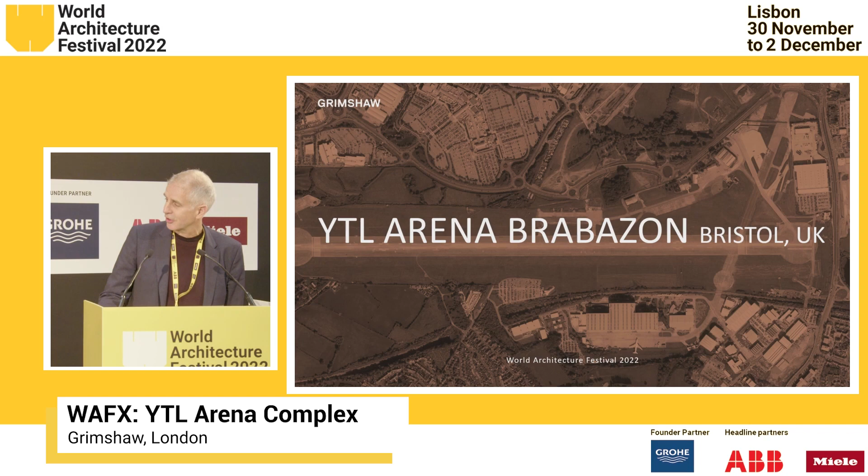I'll dive straight in. I could almost speak singularly to this slide, which is, in my view, absolutely stunning, of the old Filton Airport just to the north of the great West Region industrious city of Bristol, as Jeremy mentioned in his kind introduction.

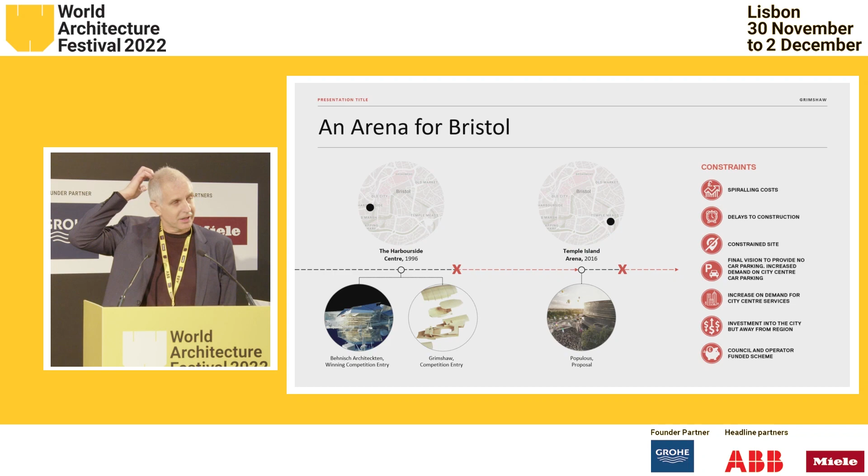For many, many years, Bristol is, I think, the only major city in the UK that has struggled to develop and find itself a site and an opportunity to create a kind of an amphitheatre, a civic arena for itself. We at Grimshaw, I arrived at Grimshaw in 1995, and shortly after that arrival there was a lovely design competition that we were shortlisted for, but Behnisch won the scheme for an arena on the harbourside in Bristol.

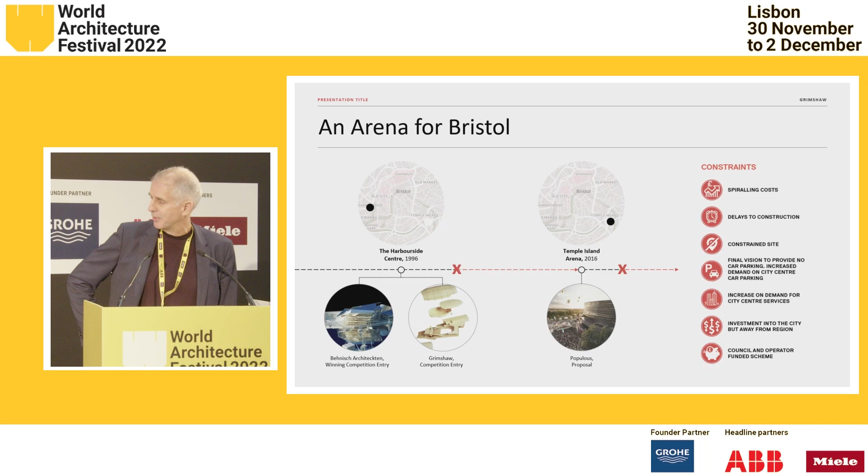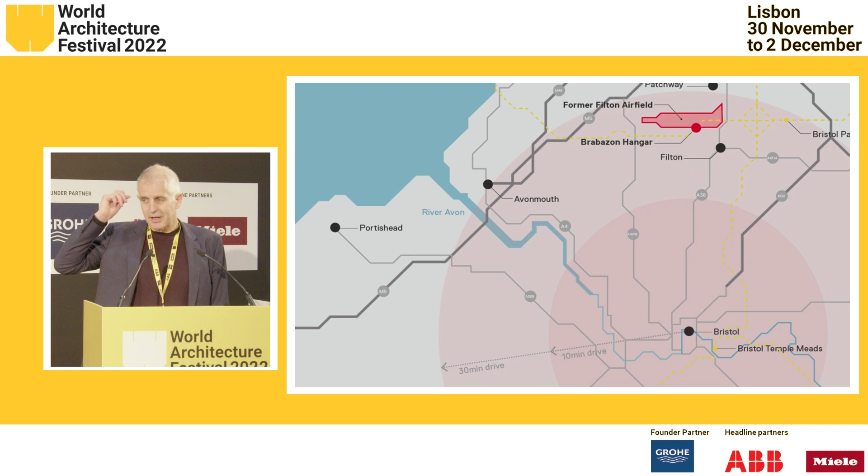That never happened. There was a further competition in Bristol for an arena close to Temple Meads that Populous won. We came a close and disappointing second to that, but again, that never happened. And at about the same time as that, our friends at YTL, who are a Malaysian developer, bought the former Filton Airfield site to the north of Bristol.

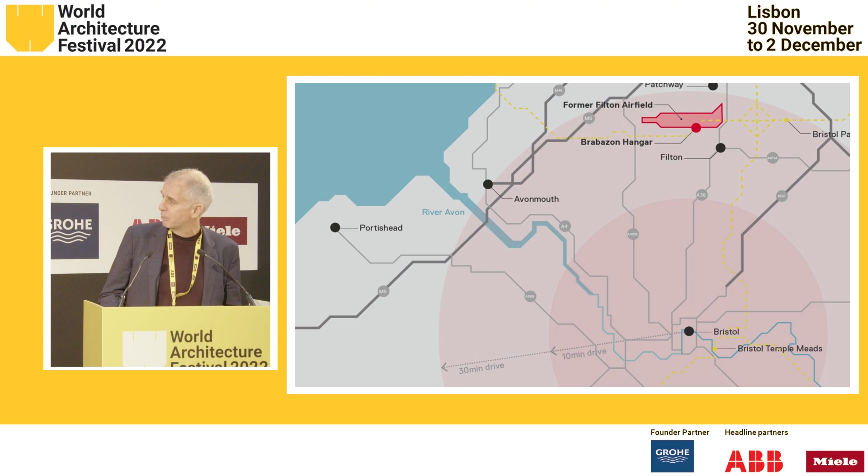They had this ambition to develop that out as a pretty dense, very appropriately dense mixed-use development, and that is ongoing and looking pretty good, I've got to say. Alongside the runway, which really is the site of that development, they acquired what was called the Brabazon Hangars, and I think YTL originally thought, well, we'll have that.

It's come pretty cheap to us because it's in a pretty forlorn state, and the value of the steel within it is actually worth more than the cost of purchasing it. So I think their original intent was to pick this up and knock it over. It wasn't listed, but when you start to consider the history of this building, it was built in 1948-49, post Second World War.

This amazing aeroplane was going to be a high comfort, high luxury transatlantic airliner, with an extraordinary wingspan. This thing was built. They prototyped a single flight, I think, and then the jet engine came in and made it immediately redundant. We've uncovered lovely little drawings of how they might go about building a hangar for this thing.

They ended up though with these remarkable 3-span hangars, each of them 80-meter clear span in width, the central one 120 meters long and the other ones 80 meters long. And as I said, YTL thought to buy these and knock them over and just continue with their redevelopment of the site.

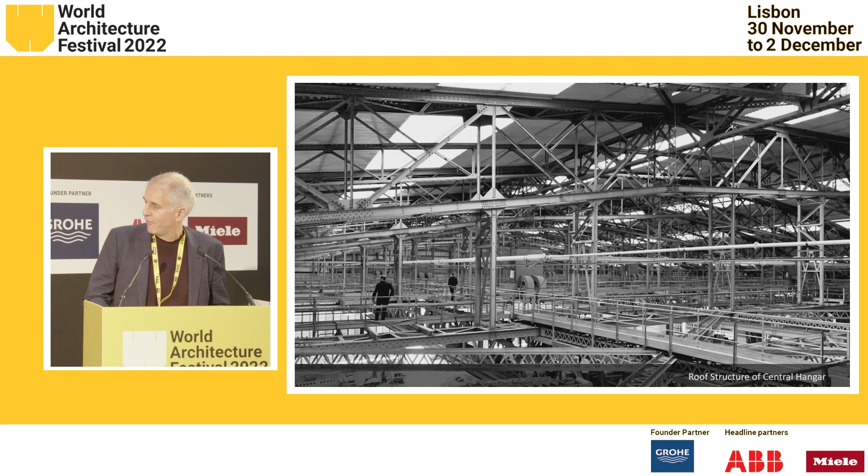As I said, if you want to defy gravity, walking amongst this amazing intricate truss structure is an experience to behold. And being fascinated with the way things are constructed as a practice, this is almost to us the perfect project. So our first exploration was to say, could we fit a major arena in that central hangar? And we've proved that we can.

It works extremely well. It's a little bit tight on the top tier, but that's no bad thing, I think. But the diagram of the arena and this tripartite use of those three hangars is almost the architect's dream, where you have this interstitial space between each of the hangars, where you can plug in the back of house and some of the front of house.

You can service each of these great spaces from that interstitial zone, and then almost thrust that into that kind of southern forecourt, and provide all of the plant and equipment that is needed to drive some of that air handling, in particular, into these large volumes.

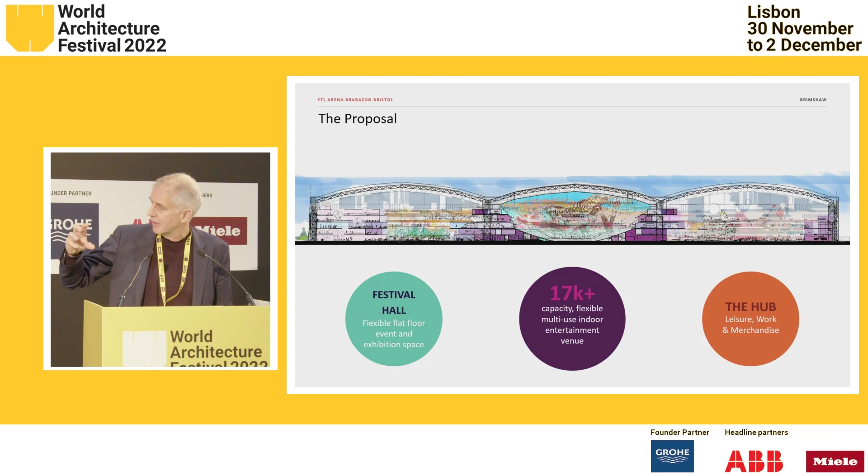At the moment, we're looking at different uses for the east and the west hangars, but they're predominantly flat floor and will benefit from the full expression and the full reveal of the structure. The central hangar needs to work, of course, acoustically, and the depth of that central truss works for us wonderfully in terms of the kind of diaphragm model of acoustics, where we can have a taut lower skin, an acoustic top skin, and not need to deal with the introduction of a heavyweight slab.

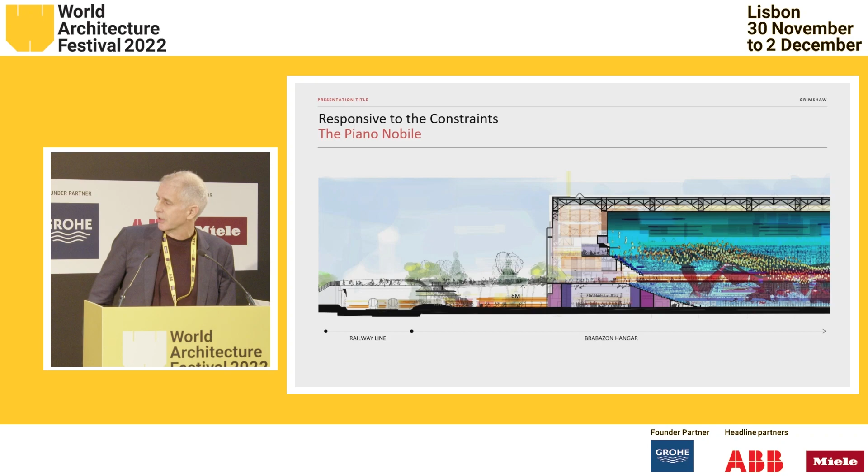In the other direction, we've got another constraint, which is a redundant or very underused railway line immediately to the north of the project. So I suppose there's another great thing about the project, which Bristol City Council have said, well, if you want an arena, you're going to have to revive the railway as well. So YTL have said, well, that's absolutely fine. We'll put a station in there and connect it back to Bristol Temple Meads, which again will be a great thing in terms of public transport.

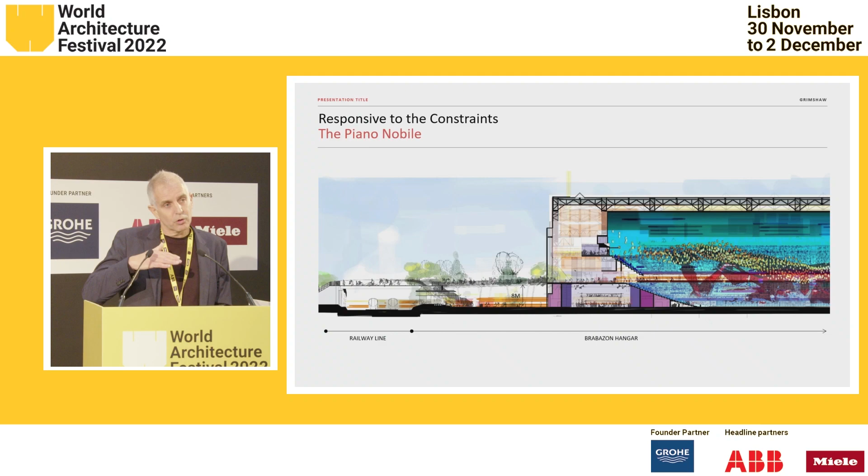But what that railway line has done is it's forced the approach to the arena some 8 meters up into the air, which means that your approach into the hangars is up in the sky, which gives us the opportunity of this idea of a piano nobile, and then a great sort of lower tier.

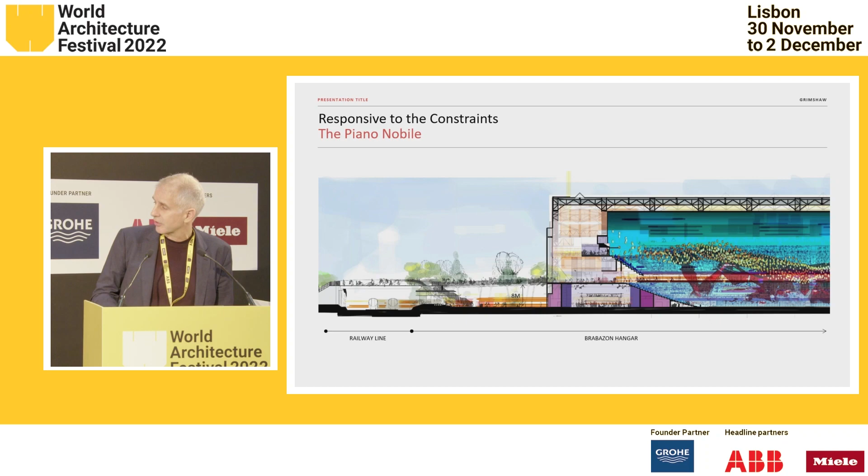Conventional arenas tend to keep that lowest concourse quite close to the ground and therefore have a smaller lower tier. We're going for a big lower tier, a big amphitheater model, and a much smaller upper tier, and then that connection transversely into the other hangars. So it's working a little bit against the conventional in terms of arena convention.

But you get this idea that you're going to have a big flat floor, a big lower tier, and then up in the gods, you're going to have a very different, more passive, I suppose, relationship to the performance. But knowing that immediately behind you, you can turn around and access concourses that look east and west into the two different hangars either side.

There's a lot of things that I could say about the adaptive reuse. I could speak to this forever, I think, in terms of the planning. The key thing here, I suppose, is our philosophical approach to this is to say, if we're going to insert the arena, let's make sure we could pull it out again in the future.

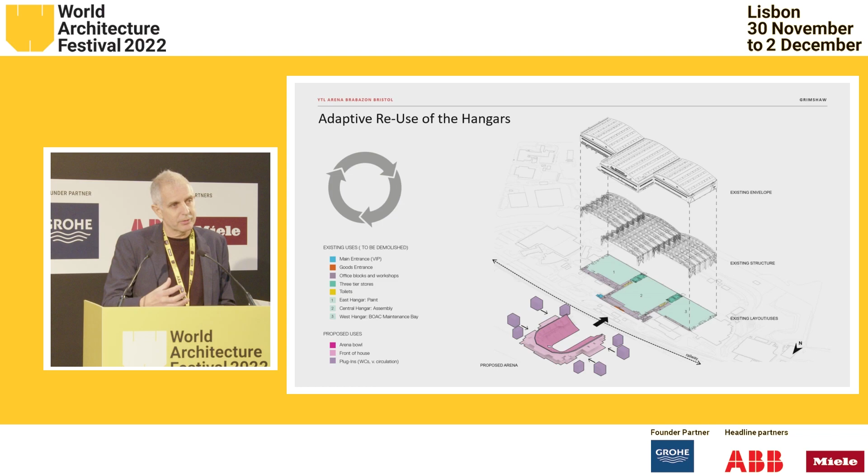So in many ways, the architecture is one of clip-on, plug-in: the fire escapes plug in from the outside, the servicing towers plug in from the outside. And then we're doing our damnedest to make sure that we don't in any way compromise the integrity of the structural steel and that everything really works around that and is clipped in, bolted in, or freestanding from it.

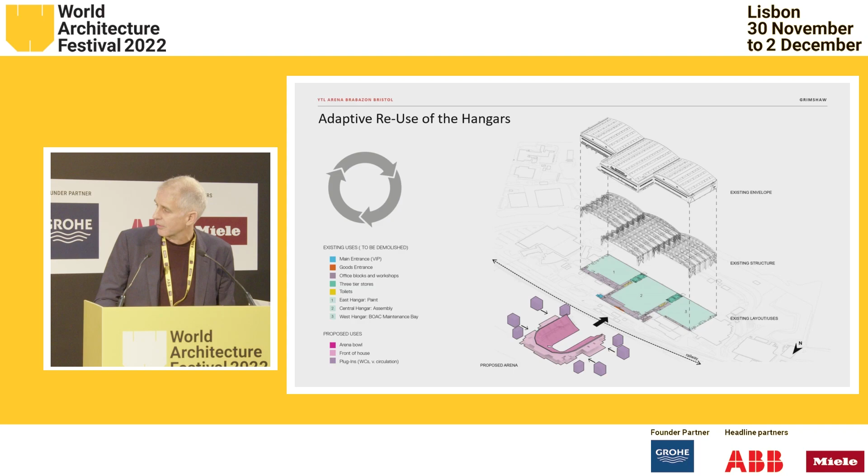There's a great series of stories on the outside of the building. I'm not going to go into that, but again, we're really keeping the existing landform. Immediately adjacent to the railway line, there's quite a depression, so we're going to use that for SuDS and recycling and harvesting of rainwater, and then use the hard stand areas immediately proximate to the great hangars for external space.

And again, as I said, we're just about to move into RIBA stage 4. This will be a heavy responsibility, but I can't wait. And the client again is, I think, breaking the conventional and really wanting to bring in those specialist contractors very, very early into the game, and giving us really strong access to the people that will work to adjust the existing structural steel and to plug in new structural elements, so that we're designing with the specialists. Similarly with the facade engineering, where I'm quite sure we'll develop specific componentry for this because of the acoustic demands of the space.

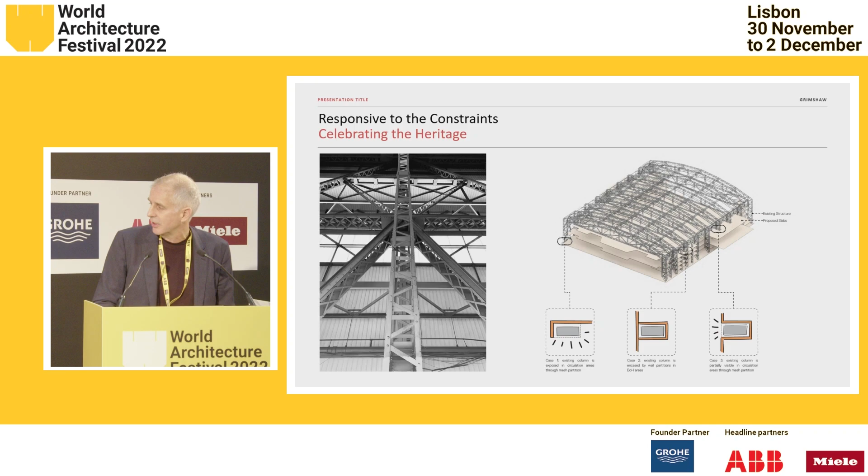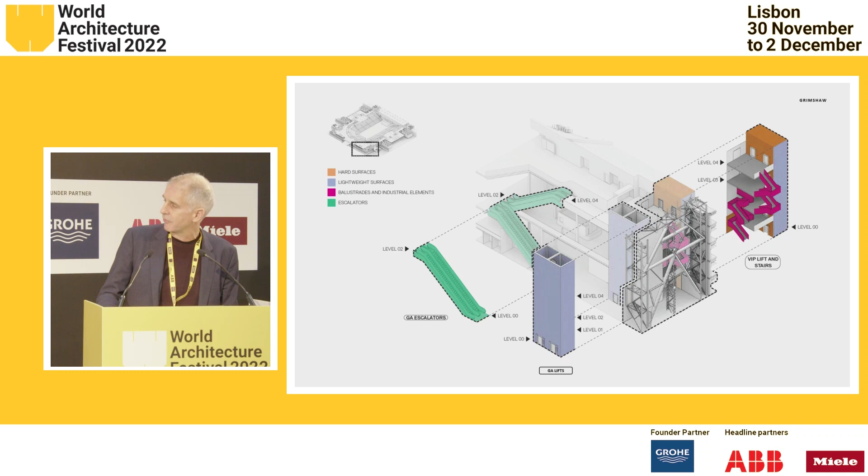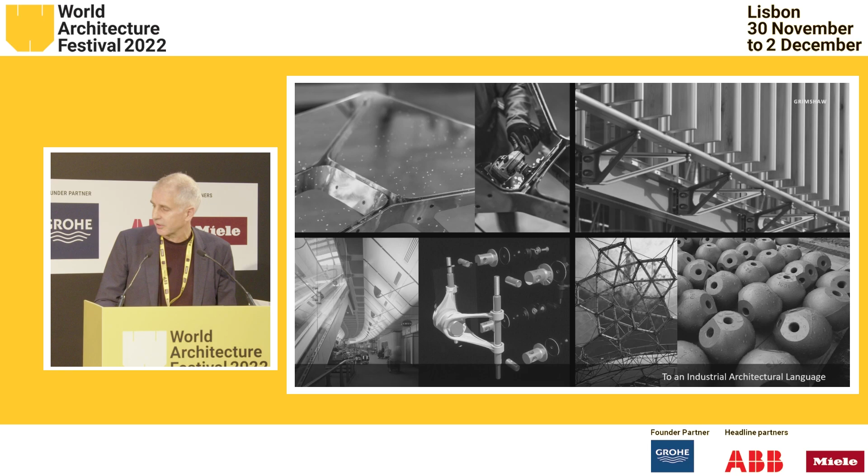And then we'll work very hard on, in particular, the mechanical plant required for the project. And that will obviously lead to this plug-in, almost like a high-tech, but modernized high-tech adaptive reuse plug-in, plug-out element. Looking for great legibility, I suppose, in terms of the architecture, knowing that if there is legibility, that works as a venue, but it also works, I think, in terms of a very conscious mindset. We can turn back and have great fun with some of that aviation technology and some of the aviation aesthetic. And of course, we can work closely with those specialist contractors as we move into stage 4.

And we'll end up, again, I think it's very hard at this stage to reveal that architecture, but everyone sitting here, I'm sure, gets a very good idea that we can hang these wonderful bars and things from that existing structure and look west and east, look into the arena, but also look west into some of these great flat floor venues that can be used for exhibition, film studio, and other entertainment hubs.